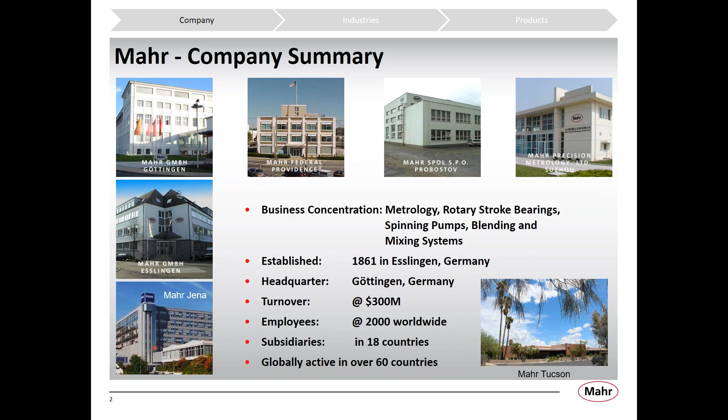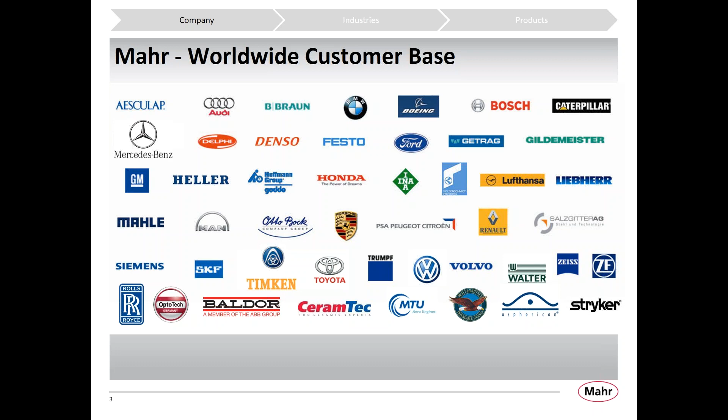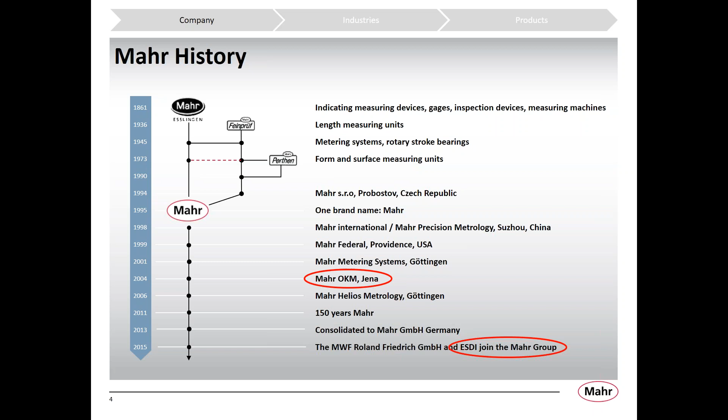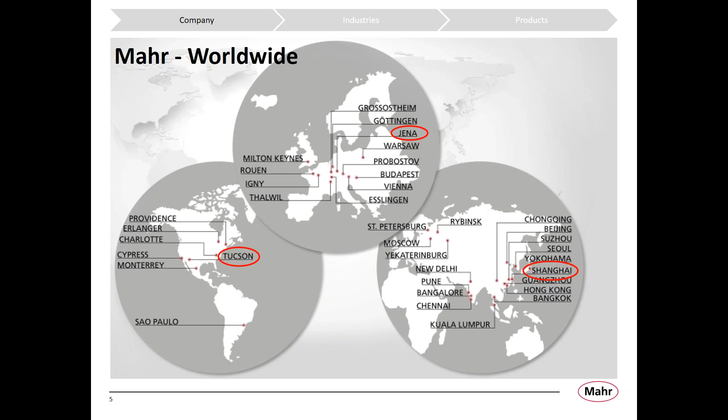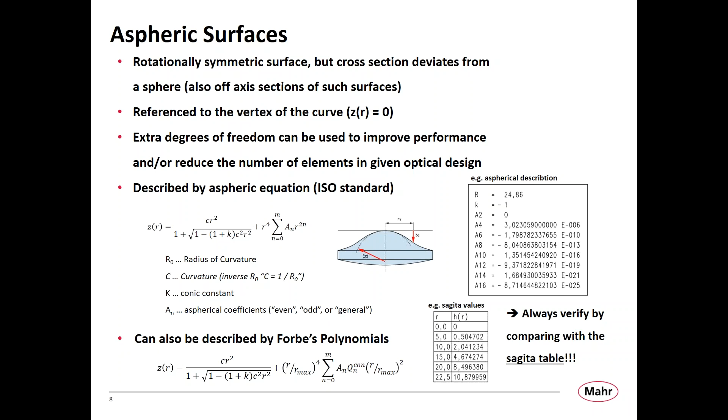However you describe the surface—and there are so many ways to do so—it's important to also include, on your optical drawings, a table of the sags, the deviation from a flat of the surface. That way, when the person puts the equation into their generating machine, or we're trying to compare it to measured data, we're able to compare the as-designed to the as-measured or as-generated surfaces, and make sure we're all using the same equations and the same coefficients.

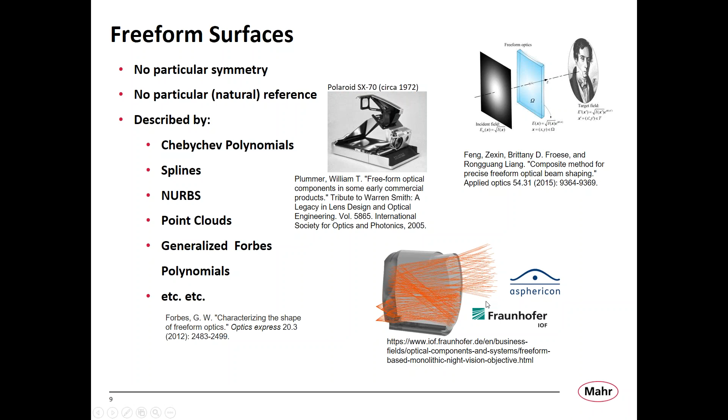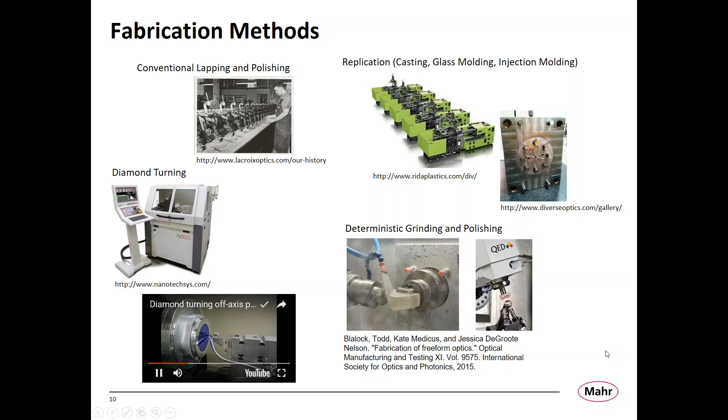However you're making the surface, you have to be able to measure it in some way to give feedback to the generating process, whether it be a tool path correction map for a diamond turning machine, or a dwell map for a grinding and polishing machine, or parameter sets for molding systems. That's what I'm going to talk about for the rest of this talk, is how do you take those measurements to give that feedback to the generating process.

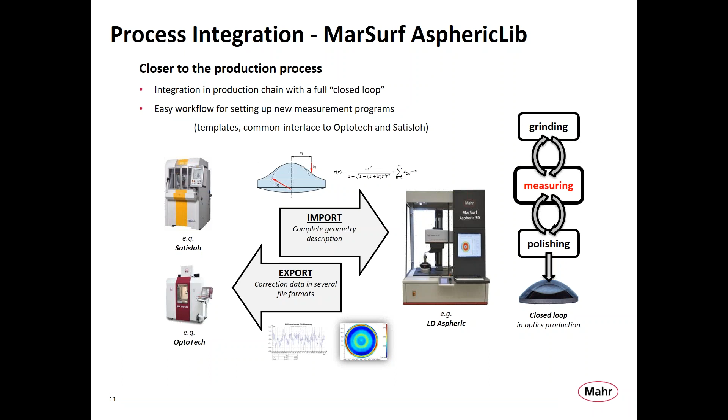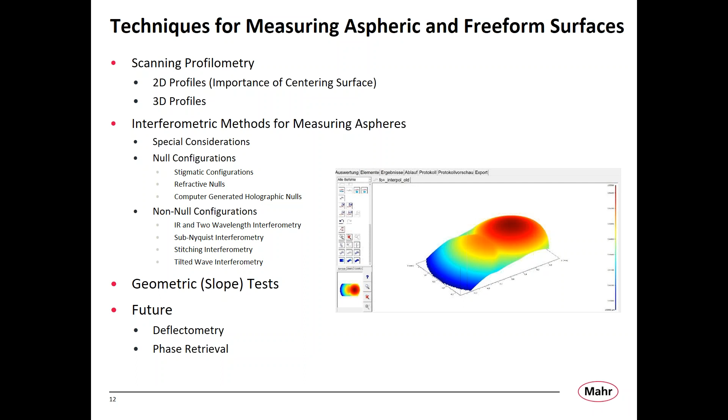I'm going to go through several different sets of techniques, including scanning profilometry, different sorts of interferometric methods for measuring aspheric surfaces, and then briefly talk about geometric slope tests such as the Hartmann test, and finally finish up with some of the future of where I think aspheric and freeform metrology is going in the near future.

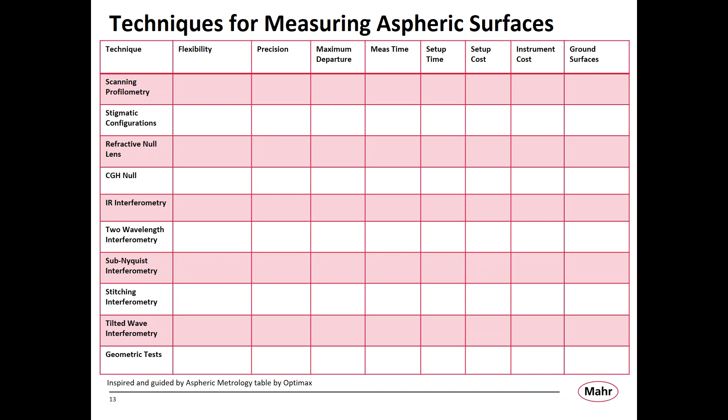The format of this talk: I will give a brief description of the technique, and then I'll bring up this table and we'll fill in this table as we go along with the different advantages and disadvantages for each technique.

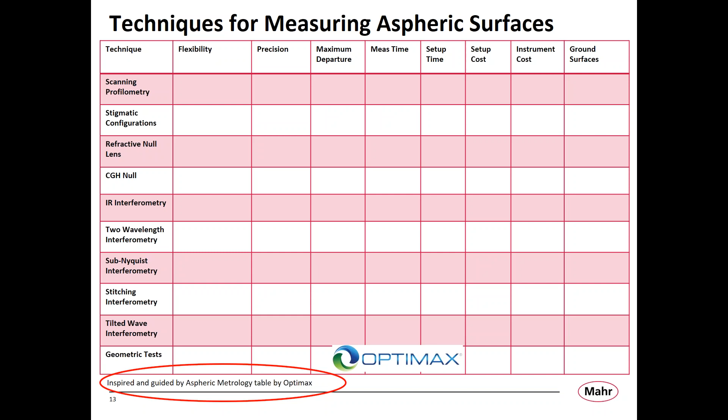I'd like to acknowledge that there have been several other groups that have done similar tables, and after I first built this table, I realized I'd seen this somewhere else, and it was in a very good application note that Optimax put out concerning aspheric metrology.

The first technique I'd like to talk about is simple 2D profilometry. This is where you're dragging a stylus across the surface and looking at the deviation of the stylus with respect to position. You get a 2D trace of the surface, and for final applications you would rather have a 3D trace of the surface, but in some applications, such as when you're first starting to grind the surface, a 2D trace is perfectly fine.

I know a lot of the optics people out there cringe a little bit when you talk about dragging a stylus across the surface, but we are able to adjust the force of that stylus on the surface electronically in one of our systems, the MarSurf LD260, and we're able to reduce it down to forces as low as 0.5 millinewtons.

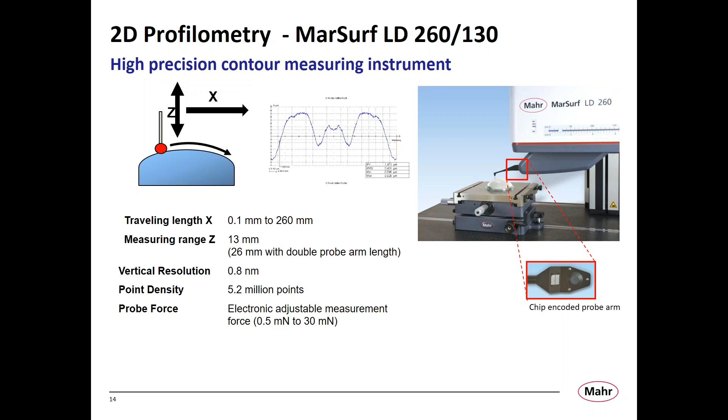So we've been able to measure some very soft surfaces with this and prove that we weren't scratching the surface by taking a scanning white light interferometer of the surface before and after the scan. But of course, always test the surface before you do anything like this. It gives you some very straightforward data - you can fit the curve and understand what the surface looks like.

Now, if you do want a 3D map of the surface, you can either probe the surface using a conventional CMM - Zeiss actually has some CMMs specifically made for measuring freeform optical surfaces - or, Mahr is very good at measuring cylindrical surfaces.

We have several systems with a precision rotary bearing where we spin the part underneath the probe. By setting the probe at some distance away from the vertex of the surface and spinning the part around, we can get a trace of the height of the surface along a circular path. If we set the probe at different distances from the vertex, we get a set of concentric profiles of the surface, and then we can fit a surface to those concentric profiles and get an idea of what the 3D surface of the lens looks like.

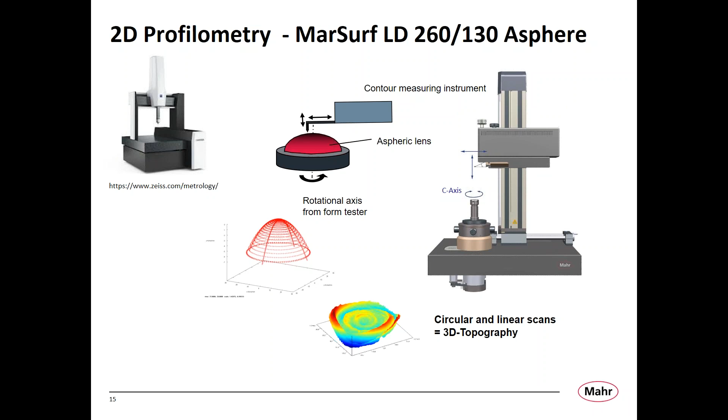So we're also able to use optical probes for doing this. We've got another system called the MFU200 that uses an optical probe where we're able to measure the distance between the surface and the tip of an optical fiber.

We illuminate the surface through the optical fiber with a broadband light source, and because there's some distance between the tip of the fiber and the surface, wherever that distance is half of the wavelength of any particular wavelength coming out of the fiber, you get destructive interference. We're able to record the constructive and destructive interference of the light with respect to wavelength in a correlogram, and the peak of that correlogram tells us the distance between the tip of the fiber and the surface under test.

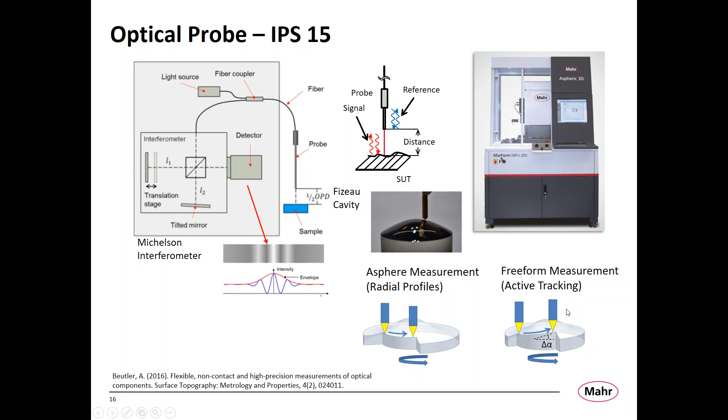So now we operate the system in two ways. In one way, we monitor the wavelength of the peak of the correlogram as we scan the part under the tip of the fiber, and that's how we usually measure an aspheric surface. Or we can move the tip of the fiber up and down to keep the peak wavelength of the correlogram constant, and record how far we had to move the fiber to keep that peak at the same wavelength. That's an active tracking method we can use to measure any arbitrary form, like a freeform surface.

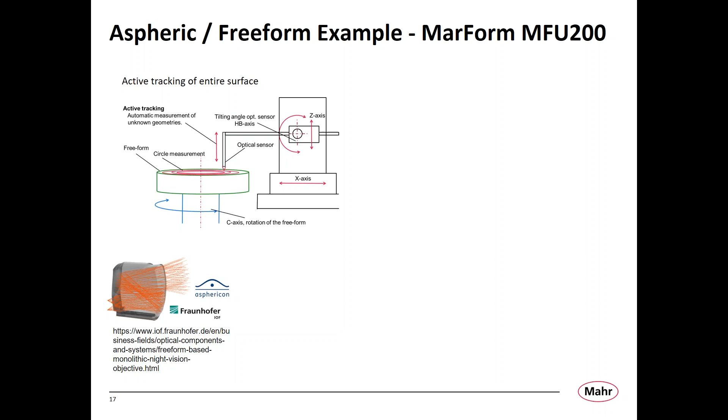So here's an example of how we use the MFU and the interferometric probe to measure a freeform surface. We measured the surface and got a surface map of the height of the surface with respect to position. On this surface map, there's two surfaces: a freeform portion and an aspheric portion of the surface.

We masked out the aspheric portion of the surface and then subtracted that from the design surface to get a deviation map of the surface with respect to design. Asphericon was able to use that as a dwell map to correct the errors of that surface. That was used in this demonstrator monolithic night vision objective that was developed by Fraunhofer.

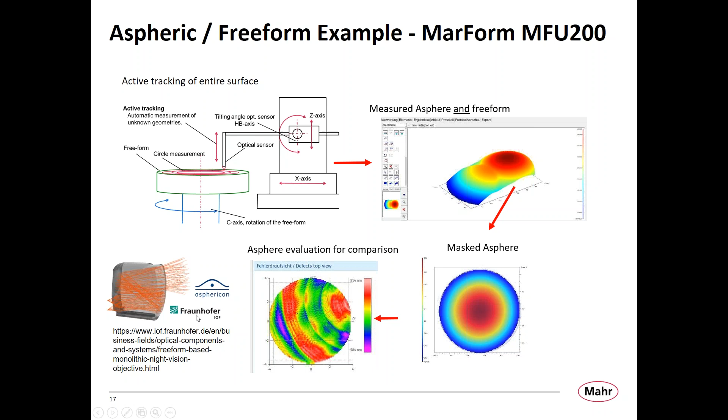Whenever you're measuring a freeform surface, as I alluded to before, there's no natural way of referencing that surface. So you need to be able to reference alignment features on that surface to your generating machine, to your metrology instrument, and to the final system.

So here you see in this case, we've created a kinematic mount that the optic lays on top of. There's three balls underneath the optic that define the plane of the optic, and then we've got two balls here and here, which reference the features that were machined into the blank of the optic.

Now when they're manufacturing the optic, they can take that optic, put it on the metrology tool, take a measurement of that surface, then take it back to the generating machine and use those same features on the substrate of the surface to align the optic to the generating machine. And then finally, once they have the surface they want, they can use those same features on the blank of the surface to align the optic into the final system.

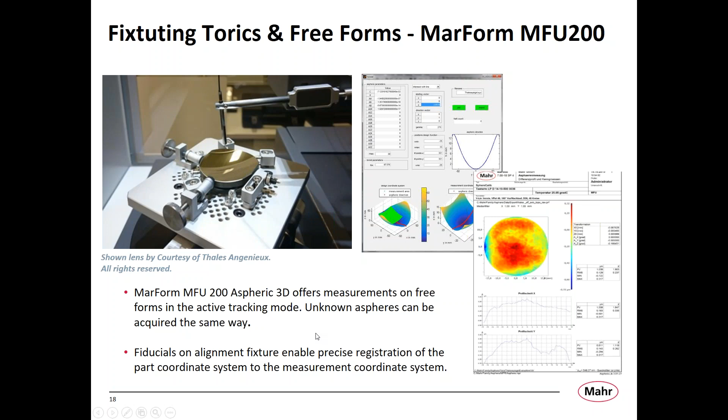One further consideration when using aspheric surfaces in particular is the alignment of the axes of the surface. Whenever you have two spherical surfaces, there's always some line that you can fit between the centers of those two spherical surfaces, which defines the axis of that particular element.

And then often you'll use that line to reference it in the edging machine, and you can define the mechanical features of the lens to line up with the optical axis of both of those surfaces.

However, for an aspheric surface, since there's an axis of rotation that's specific for each surface, there's no way, if you've got two aspheric surfaces on an optical element, to align both of those axes together. No natural way of just putting a line through both of those axes. So you need to be able to measure the tilt between the axes of both surfaces, and also reference that to the mechanical edge of the element.

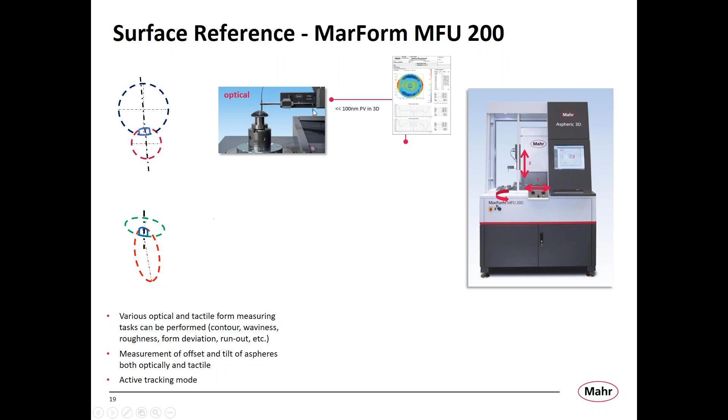So one of the ways that we do that with the MarForm, the MFU 200, is we're able to measure one of the optical surfaces using the non-contact interferometric point sensor, as I talked about earlier. And then we have another probe, if you can see that off to the right of that interferometric point sensor, there's another mechanical probe on that same arm.

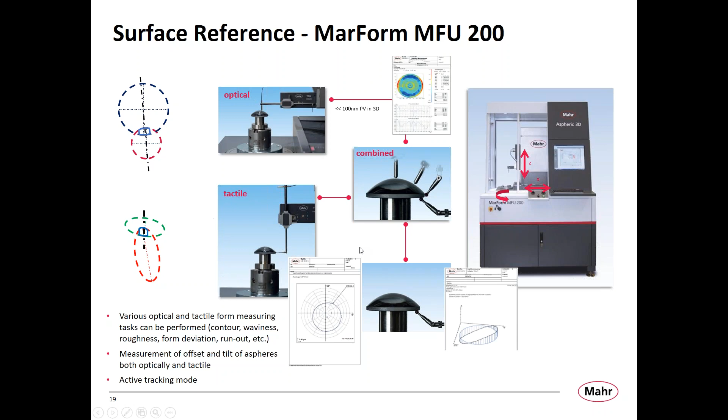So we just rotate the arm around, and we're able to use that to pick up the edge of the element that we're testing, without moving the element. Then we use a third probe on that arm to pick up the underside of the element. So now on one machine, without moving the element under test, you're able to pick up the front surface, the back surface, and the mechanical edge of the part, and register all three of those together and get information about the tilt and decenter of each of those surfaces.

So some of the advantages of scanning profilometry is that there's no real symmetry required for the part. You can measure just about anything, well, within reason.

It can measure large departures of the surface from a reference surface. However, you're limited in the precision of a mechanical profiler to about 50 nanometers or so, and some, depending on the profiler, are up to 5 micron precisions. But the MFU, for example, can go down to about 50 nanometers. There's a large variety of price points for these instruments, all the way from a few tens of thousands of dollars to some of the precision CMMs that could cost up to $1 million.

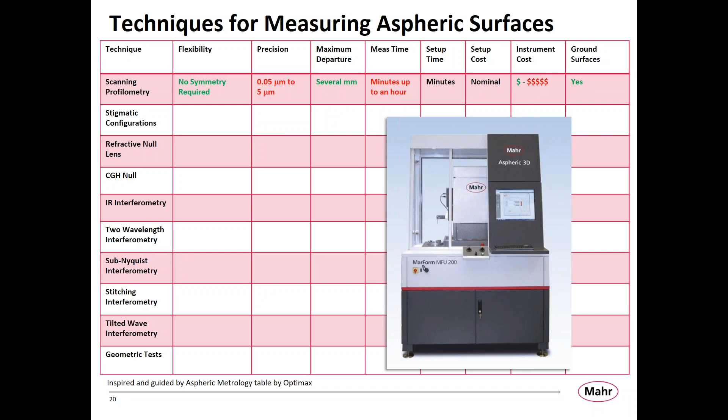One of the things I didn't mention is that since for the mechanical probes you're not really relying on any sort of reflection from the surface, you can measure ground surfaces with these. So you can measure the surface early in the process.

The rest of the talk is going to be mostly about interferometric methods, so I don't think for this group I really have to go through this too much. But for anyone out there listening who is not familiar with interferometry: interferometry is looking at the distance between two surfaces using the phase of the light reflected from both of those surfaces.

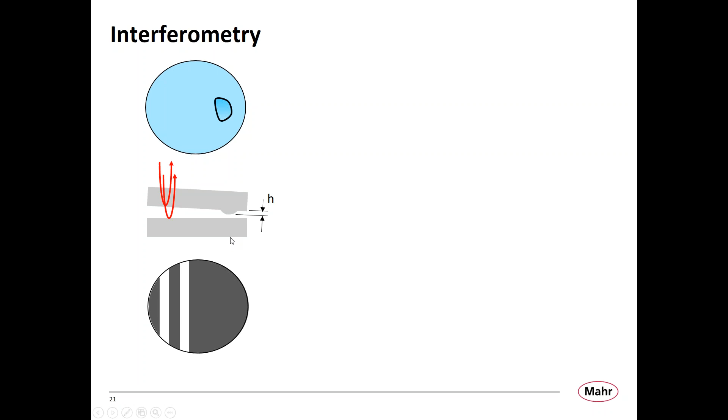If I have light reflected from this top surface, my test piece here, and then I reflect light off of this bottom surface, also my test piece, if that light is in phase, then what I see up here is a bright line or a bright spot, because that light interfered constructively. Now, if they're an odd number of half wavelengths out, I see a dark spot because they interfere destructively.

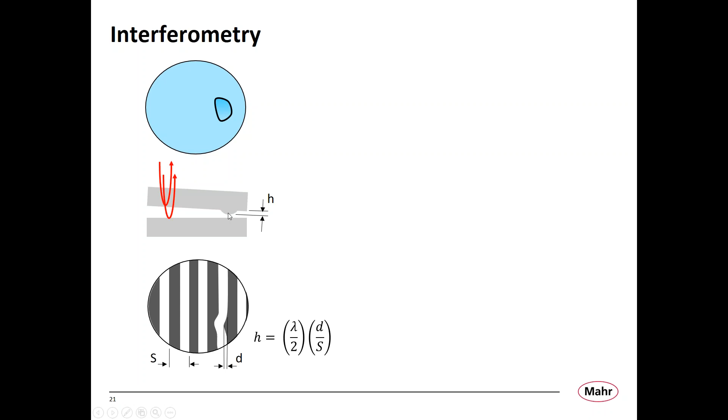If I keep going across the surface, the distance between two of the same points, we're going to call that a fringe. The distance between two similar points on that fringe is going to be the fringe spacing. I will get fringes across until I hit some sort of deviation in that surface that's going to show up as a bend in that fringe, and the bend in that fringe is then going to be related to the height of that deviation of the surface.

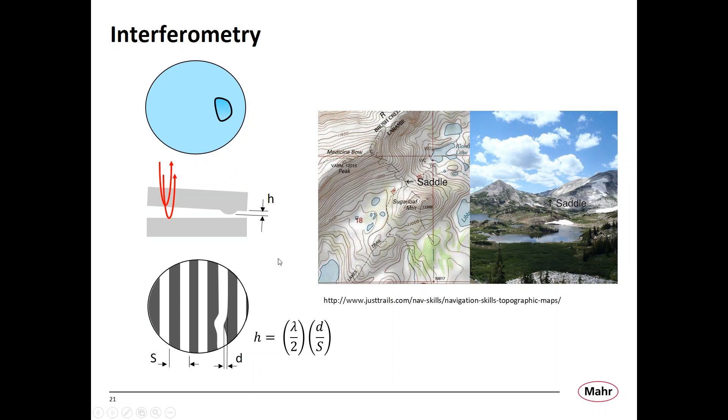You can kind of think of this fringe pattern as a contour map of the surface, and as the difference between these two surfaces becomes steeper and steeper, this fringe pattern is going to become closer and closer together until you can't resolve it with your imaging system. That's one of the problems I'm going to talk about in each of these systems.

Some of the unique considerations when measuring an aspheric surface, as opposed to a flat or spherical surface, using interferometry: these generating techniques often cause mid-spatial frequency errors—errors that are not quite form errors, not quite roughness errors, but periodic errors in the surface on the order of 10 line pair to 100 line pair per millimeter, which are very difficult to resolve with conventional interferometry. But they are very important for controlling the process.

With interferometric techniques of measuring aspheric surfaces, you'll also often have surfaces that have some inflection point in them. Interferometry has a hard time measuring that inflection point because the rays cross each other and you can't really tell what portion of the surface the rays are coming from.

The results of measuring an aspheric surface with interferometry are often very sensitive to alignment, and that alignment is often very difficult. So it's hard to separate errors in the surface from errors in the alignment of the parts of the interferometer.

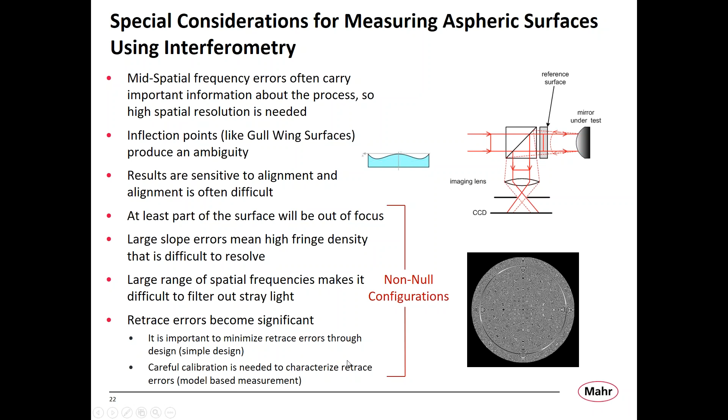Finally, because the rays don't go back through the interferometer in the same way, the interferometer is going to induce errors in the measurement. These are dependent upon the surface you're testing, and we call those retrace errors. So it's important to do very careful calibrations of the interferometer to characterize what those retrace errors are going to be for any particular surface.

The first technique I'd like to talk about in testing aspheric surfaces is one that's often used for testing sections of conics. A conic surface always has a stigmatic point or a set of stigmatic points, and you can use those as a way of testing the asphere with a spherical reference.

For example, in testing a parabola, the interferometer creates a spherical reference wavefront using a transmission sphere that focuses to a point. If you put that focus point at the focus of the parabola, then if it's a perfect parabola it will perfectly collimate the light, creating a plane wavefront that hits a reference flat. This reference flat retroreflects that collimated light back to the interferometer, back to the parabola, and if the parabola is perfect, it will perfectly focus the light back to the focus, creating a wavefront that interferes with the test wavefront.

If you're all lined up and everything is perfect and the shape of the surface is perfect, then you get a null fringe. Any deviation from that is either due to misalignment of the system or due to an error in your surface. You're able to do this for many conic sections.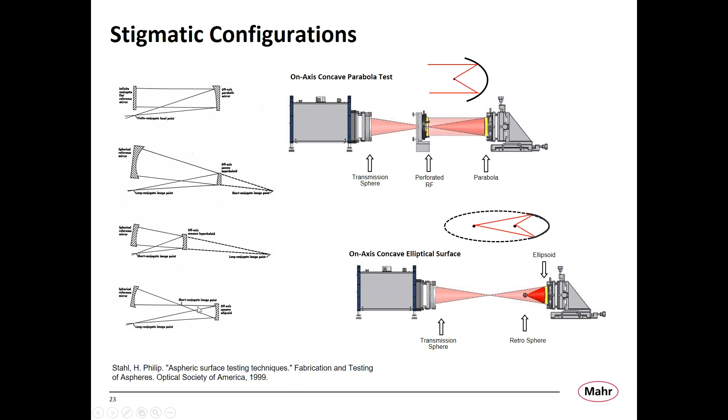For example, here's an ellipsoidal surface, and it's often used in testing these surfaces off axis. It's a very useful technique. You can measure the surfaces with interferometric precision of tens to hundreds of nanometers.

You can only measure conic surfaces, or surfaces that have stigmatic points, where you can get access to those stigmatic points. So that really limits the usefulness of the technique. You cannot measure large departures of the surface from its design.

It doesn't take long to take the measurement, but it can take hours to set up because it's so hard to get the alignment right. It's a fairly cheap test because all you need is the conventional interferometer you might already have in your optics shop, plus some auxiliary optics, and of course fixturing to align everything. Fixturing can be very important in this setup—if you fixture things right, it can make the alignment a lot easier.

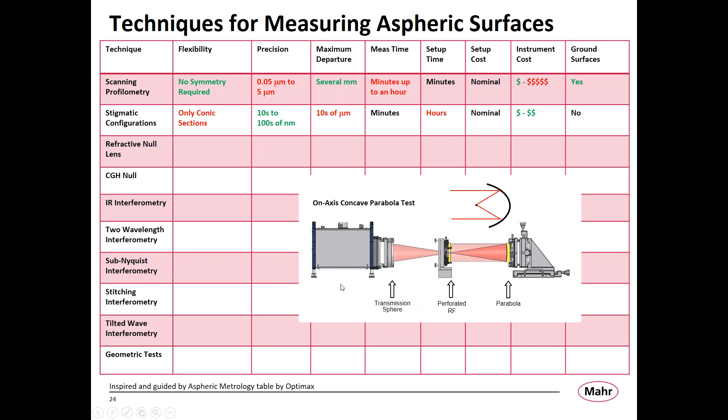For the computer-generated holographic surface, you can basically design an arbitrary diffractive structure to generate an arbitrary wavefront to compare with the surface under test. You can make these fairly well and very precisely using e-beam lithography and etching techniques that were developed for the lithography industry.

One of the nice things about using a computer-generated holographic null is that in addition to making the pattern to generate the wavefront you're interested in, you can also precisely put other patterns on the same substrate at the same time that you can use to align the CGH to the interferometer and align the test optic to the CGH. So you can really improve the ability to align the system.

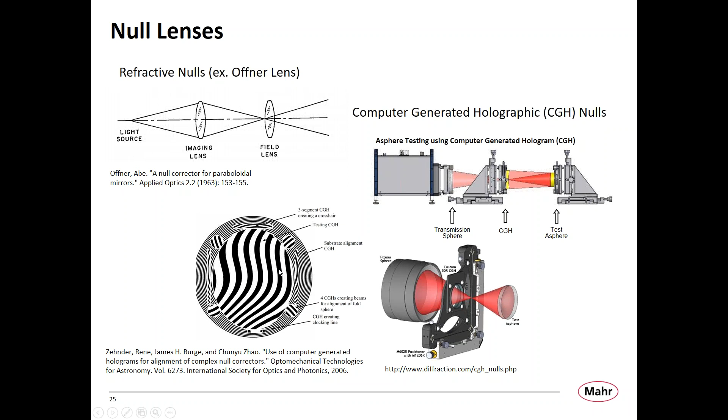So for refractive nulls and computer-generated holographic nulls, you can still measure with interferometric precision. You really can't measure any surfaces that deviate a lot from the wavefront that you generated with the null system.

They can be very fast to take measurements, but it can take weeks to months to actually make the systems to generate the null surfaces you want, and those can be fairly expensive. For example, a computer-generated holographic null can cost anywhere from $5,000 to $20,000. So if you're measuring a particular surface over and over again, and can amortize that cost and setup time over all those lenses, this can be a very good solution for measuring your aspheric or even freeform surfaces.

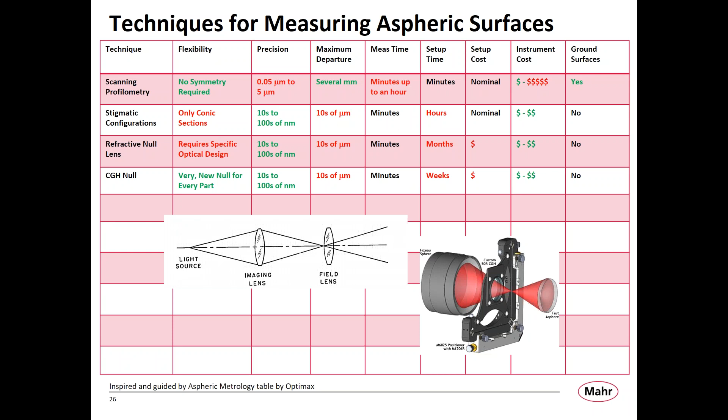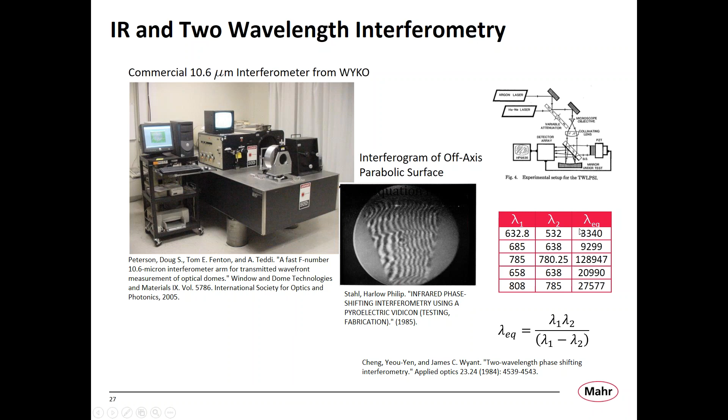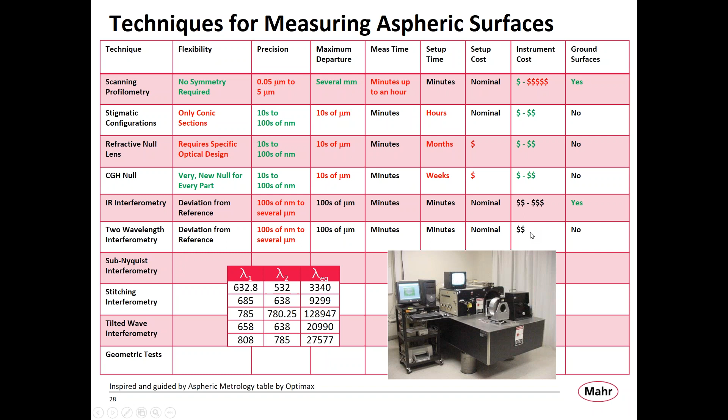So with IR interferometry and two-wavelength interferometry, you can measure very large departures from the reference surface. However, you're limited in precision to the wavelength, or equivalent wavelength, that you're measuring with. You can get very fast measurement times, and the setups are fairly straightforward. The instruments can be slightly more expensive than a conventional interferometer.

Another way of getting around high fringe densities is to use sub-Nyquist interferometry. In conventional phase shifting interferometry, you're depending on a difference in intensity on a pixel as you vary the distance between the reference and test surface. As you vary that distance, the fringes shift, and you depend on the intensity at a particular pixel as the fringes shift to get information about the surface. So if you have more than one fringe covering a pixel, when you do that shift, your measured intensity doesn't vary on those pixels where the fringe density is too large.

However, if you put a pinhole mask over that detector array, you're only looking at a very small area, getting light from the small area that pixel covers. Now you do that fringe phase shifting - watch this one pinhole here and that one fringe. When you do that phase shifting, you get information about the wavefront at that particular point.

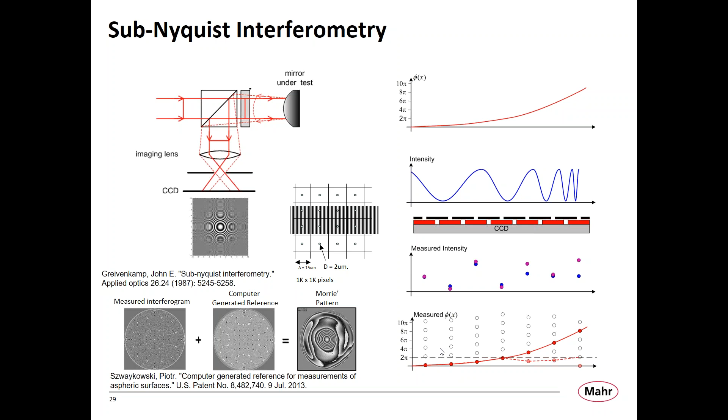So with sub-Nyquist interferometry, I can now measure large departures of the surface from the reference, with interferometric precision. I can handle a large range of surfaces. The setup time and measurement time is comparable to conventional interferometers. And of course, because you have to put this mask on top of the detector array and do all these extra things, these instruments are slightly more expensive than a conventional interferometer.

And we are now redeveloping this interferometer here at Mahr.

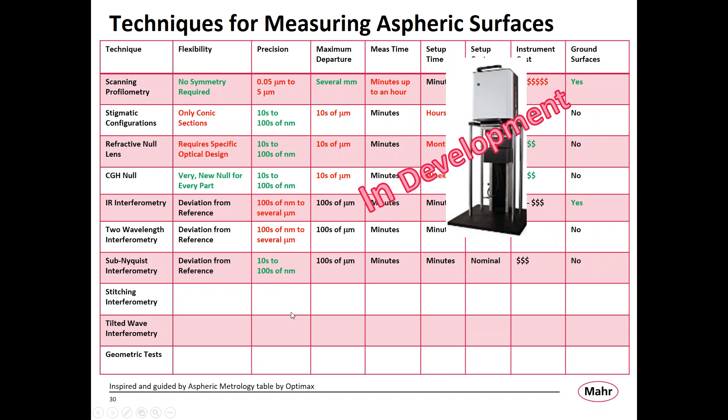Another technique for measuring large departures from the reference sphere is just to use different reference spheres, or measure the part at different points. So you're fitting different radius or curvature spheres to the surface.

Here's an example of how Zygo does it with their Verifire Asphere tool. They take the part and move it along the optical axis, and each time they move it, they're able to resolve fringes in a different portion of the pupil. By moving the part and getting fringes that they can fit a surface to in each of these annular zones, they stitch together those zones to get a map of a complete surface.

QED has another technique for stitching together areas of the part to get a complete map of the surface. They move the part so that they get resolvable fringes over different areas for different orientations of the part, and make these areas overlap so that once they've determined the form of the surface over each small overlapping area, they can stitch those together to get an idea of what the entire surface looks like.

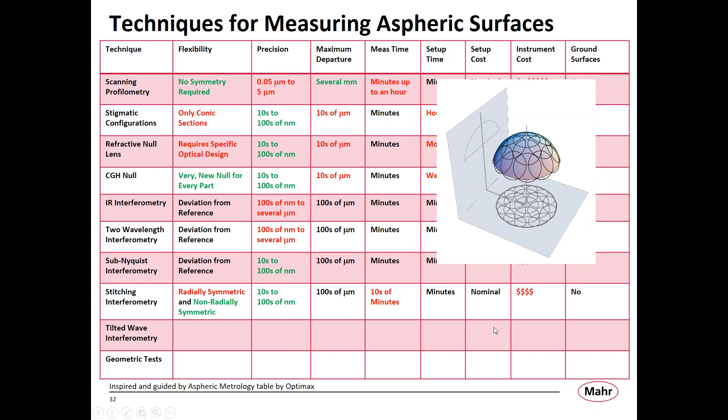So a method that Mahr is developing, originally proposed and initially developed by Wolfgang Osten's group in Stuttgart, is called the tilted wave interferometer.

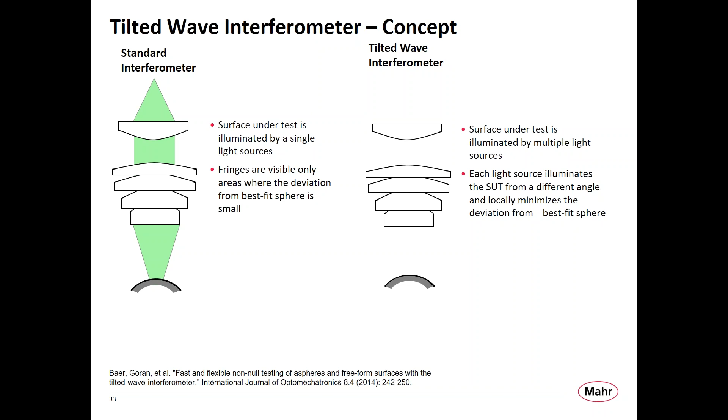For a standard interferometer, you have a point source that is collimated and focused using the reference optic to create the reference wavefront for the part under test. Now if I take that point source and move it, I get an interferogram just like in the stitching interferometers, but now I'm actually tilting the reference wavefront with respect to the part under test.

If I move that point source to another spot in the entrance pupil, I get another wavefront tilted at a different angle with respect to the part under test. I continue to do that, and I get a series of interferograms, each with a different tilted wavefront. That would take quite a while also.

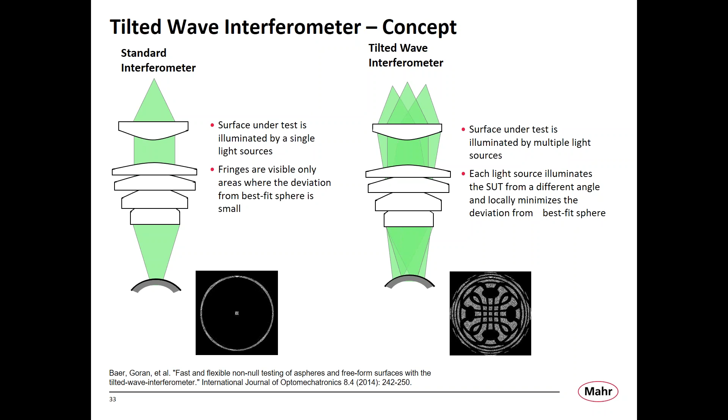But what Osten's group realized is that instead of moving the point source, you can create a bunch of point sources using a lenslet array. So that's exactly what they did: they created hundreds of point sources by putting a lenslet array in the pupil.

Then they can phase shift the interferogram, and get a set of phase shifted interferograms that are a combination of the interferograms created by each of those point sources.

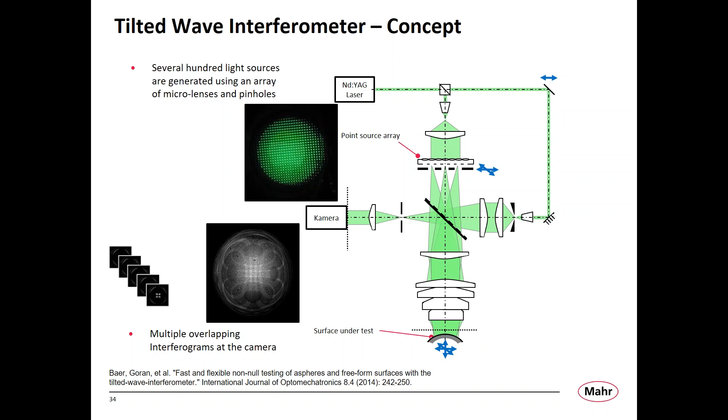One of the issues with this is that the interferograms from adjacent point sources will overlap, and you won't be able to distinguish the information from one lenslet from the lenslet next to it. So we put a multi-lens aperture into the system that blocks 3 out of every 4 lenses, so we're only looking at the information from every 4th lens.

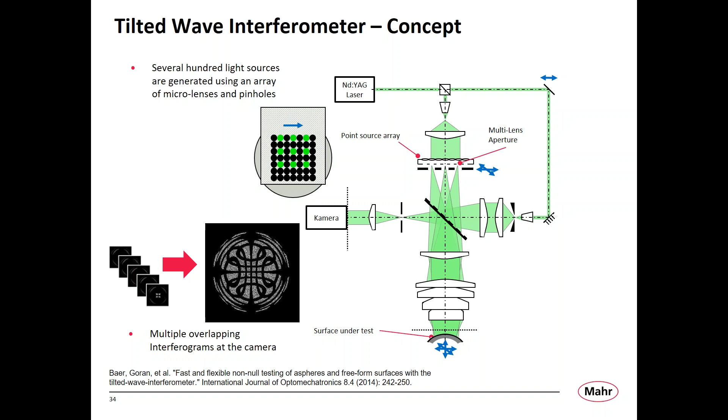And then we move that aperture around. So now instead of moving the part and needing to move it very precisely, all we're doing is moving an aperture around to get a bunch of parallel information at once. So we get 4 sets of information from each position of that multi-lens aperture, and that positioning doesn't have to be as precise as the positioning of the surface for stitching.

And so we get sets of interferograms that we're then able to determine the phase and unwrap, and determine the surface shape for each of those 4 sets of interferograms, and then combine those to get a map of the entire surface.

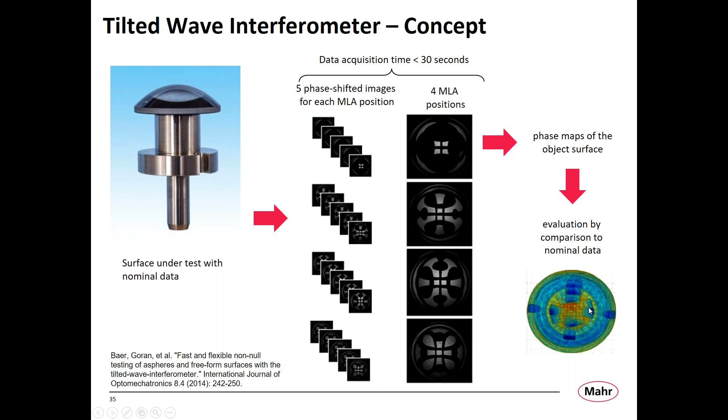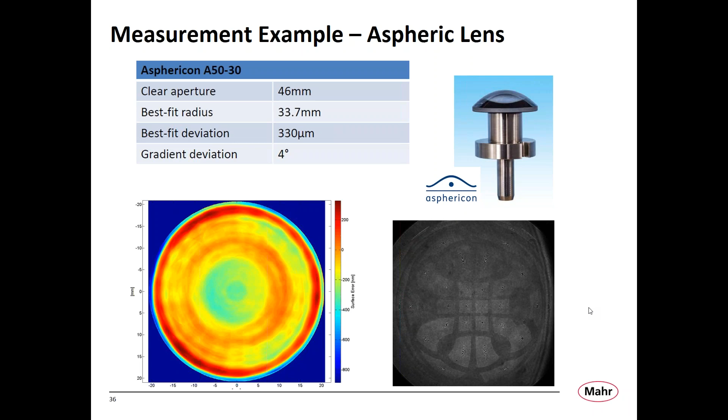Here's an example of doing this for a fairly mild asphere. This one has a gradient, a deviation from spherical of only about 4 degrees. But with this technique, we're able to do deviations of up to about 8 to 10 degrees, which is significant.

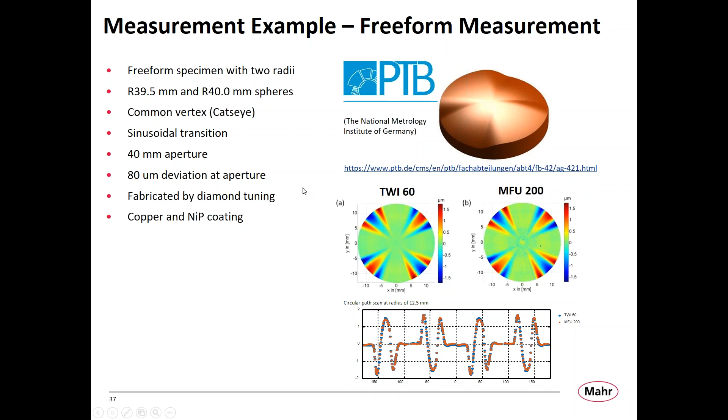So with the tilted wave technique, you can measure large departures, just like with stitching interferometry, and with interferometric precision, just like stitching interferometry. But instead of taking tens of minutes per measurement because you have to move either the part or the interferometer, now you can do it in minutes, because all you're moving is that subaperture array, so you don't get conflicting data between the different point sources.

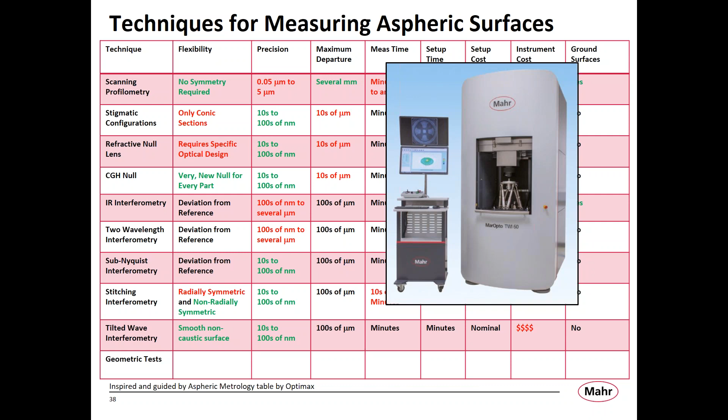And it's equivalent in price to the stitching interferometers. So we are now in pre-production with this. We have several instruments in the field with select customers, and we're gathering data and user experience so we can introduce those sometime next year.

I'd like to also bring in geometric tests, such as the Hartmann test or the knife edge test. These tests are generally more qualitative than quantitative, although there are quantitative versions of each. I'll talk about another method called deflectometry in a bit, which is a quantitative version of what they like to call a reverse Hartmann test.

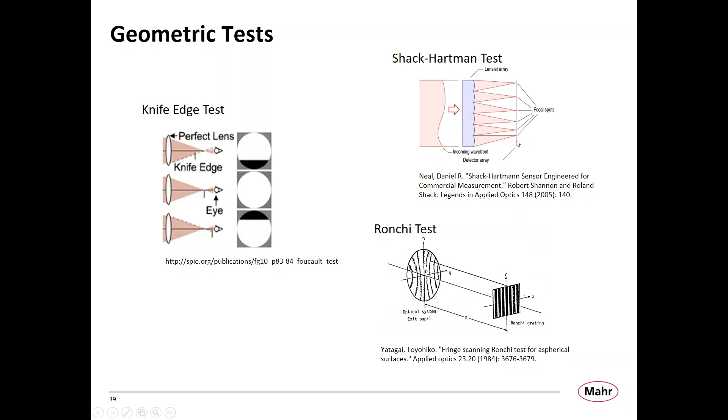In each of these tests, you've got the wavefront, and you're deviating it some way using the test and observing that deviation on a detector. If everything were perfect with the wavefront, for the Hartmann test, all the lenslets would focus right at the center of each reference point on the focal plane, and any deviation from perfect causes the point to shift in the focal plane. So geometric tests are nice in that they can measure large departures.

They can't really match the precision of interferometric tests, but they can be really cheap to set up, so it's a good secondary test to make sure that all the expensive tests you've made haven't had some alignment done incorrectly. I'm a big fan of using geometric tests to check on the interferometric tests you're doing.

One of these geometric tests that I think will be used more and more in the future is what's now termed deflectometry. The group at the Mirror Lab at the University of Arizona is using deflectometry to great advantage. Basically, they hang a big screen TV above the optic with a series of lines on it, and those lines are reflected by the optic and viewed with a camera.

When the lines from the camera are reflected by a curved optic, the line itself will curve. They're able to phase shift, moving these lines back and forth, look at how the lines in the image plane change, and then calculate the shape of the surface from that.

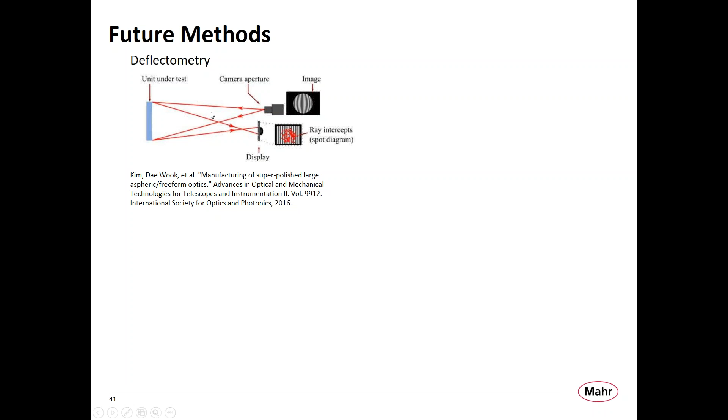One of the important parts of this, though, is you need to calibrate it very well. You need to know the exact distance from every point on the display to every point on the surface under test, to every pixel in the camera array. You have to know all those distances very precisely, so there are a lot of calibration techniques they've worked up for determining those distances. That's a very neat technique.

Another technique that I think will be used more and more for measuring the shape of surfaces, which has been used in the past to great advantage for measuring the shape of wavefronts, is phase retrieval.

With phase retrieval, you're moving an aperture around the pupil, and you're recording the intensity on a camera, a detector array, for every position of that aperture, every position of that sub-aperture. Using ray tracing, if you know the shape of the wavefront hitting the surface under test, what the surface under test looks like, and precisely where that sub-aperture was and what shape it is, you can calculate what the intensity pattern on the detector is going to be.

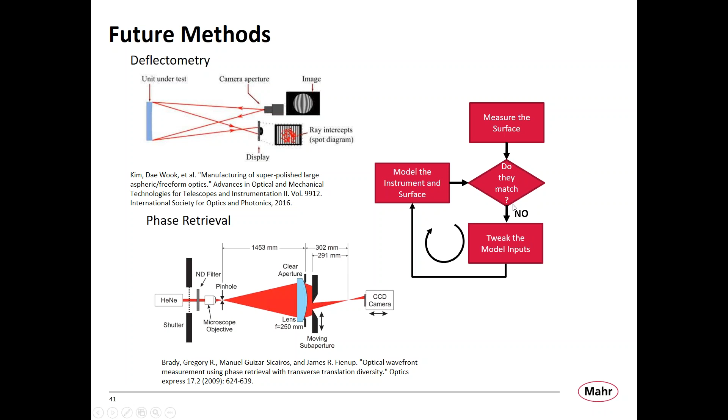So now, if you've got a model of the measurement and you've got a measurement, you can compare those two together and see if they match. If they don't match, I tweak something in my model, such as changing the shape of one of the surfaces on the lens, and recalculate the model, then check if it matches again. I keep going around in this cycle until I get a measured result that matches the modeled result. When it matches, I've determined, to some degree, what the shape of that surface looks like.

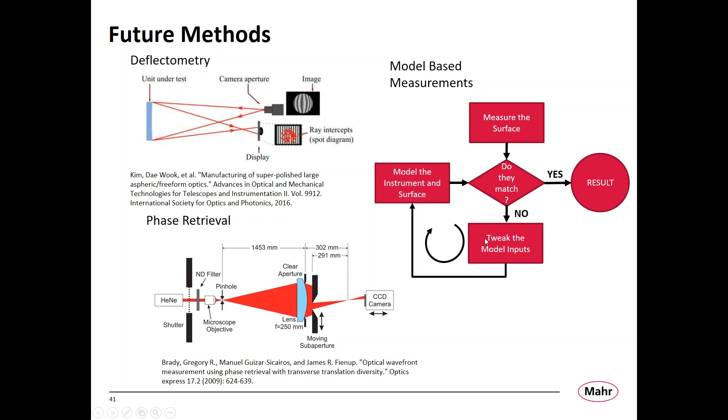I call this model-based measurement, and I think model-based measurements are going to be more and more important for determining the shape of surfaces with low uncertainties for just about any of these techniques. For example, with deflectometry, a model-based measurement could be used to determine the relationship between the positions of the camera, the display, and the optic, using those positions in the model-based measurement.

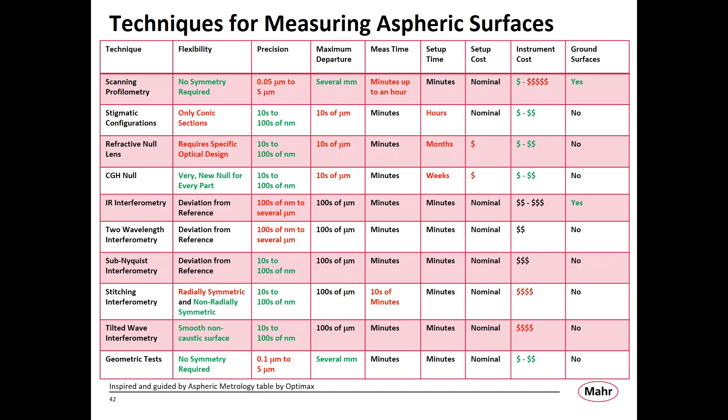This is a summary of what I've talked about. You can see there is no perfect technique for doing every measurement you need to make on aspheric and freeform surfaces. But hopefully I've given you some idea of the advantages and disadvantages of each technique, so you can use that to pick the metrology techniques that are best for your particular application. With that, I think we're ready for any questions and answers.

Well, hopefully. Thank you so much, Brent. Yeah.